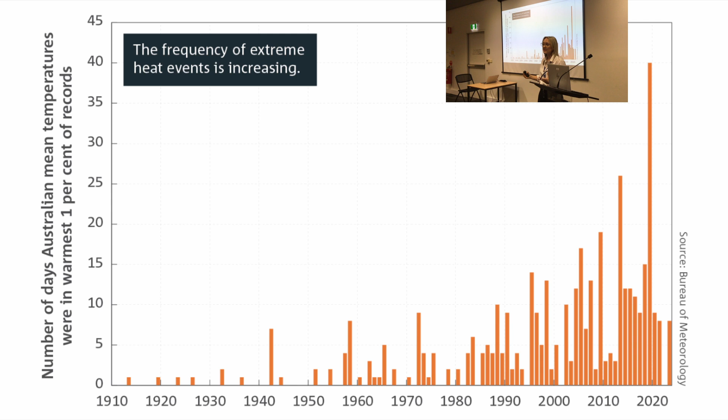You can see here in this chart that the frequency and severity of the extreme heat events we're experiencing here in Australia are only becoming more common with the climate crisis. The fact is that the last decade was the hottest decade on record. Last year, 2024, was the hottest year on record, and it's not showing any signs of slowing down soon. Already last month, January, was the hottest January on record. So we're seeing more and more of this, and the reality is that these extreme heat events, these longer, hotter summers are here to stay, and it's only going to get worse.

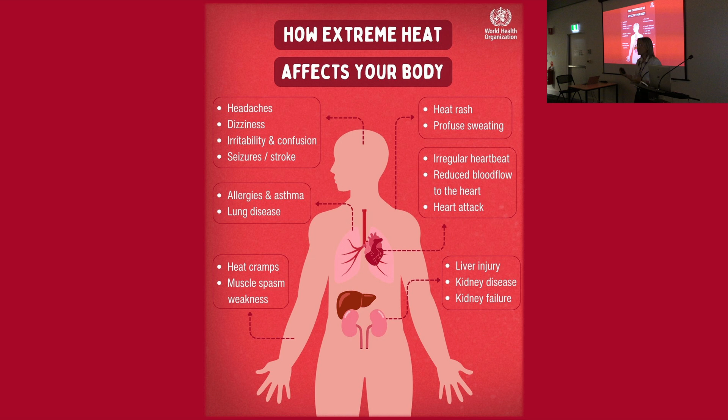Not only does this make for uncomfortable homes and uncomfortable summers, but it's also having major impacts on our health. Heat-related illness can span from anything from heat stroke, headaches, dizziness, to the other extremes of strokes and organ failure, heart attacks, and even death.

The reality is that our homes are not equipped to be able to handle the changing climate that we're now facing, and having cool homes is no longer a luxury. It's a necessity. It's something that we all need. But our homes weren't built for this. Most of our housing stock has really poor thermal efficiency. There's no insulation. So there's a lot of work that needs to be done to get our homes ready for these summers that we're having and that we're going to keep having.

So that's why we're all here tonight. That's what we're going to learn about. We've got our expert speaker here tonight who's going to share with you practical and actionable solutions for how you can make your home more comfortable in these summer months. Not only that, some of these solutions will make your homes more comfortable in winter as well, but they're also going to help you make your home more energy efficient. That means you'll be paying less for your energy costs over time because of some of these actions that you're implementing. And that's great because it's also going to reduce greenhouse gas emissions, and it's these greenhouse gas emissions that are fueling the climate catastrophe that is driving these heat weather events.

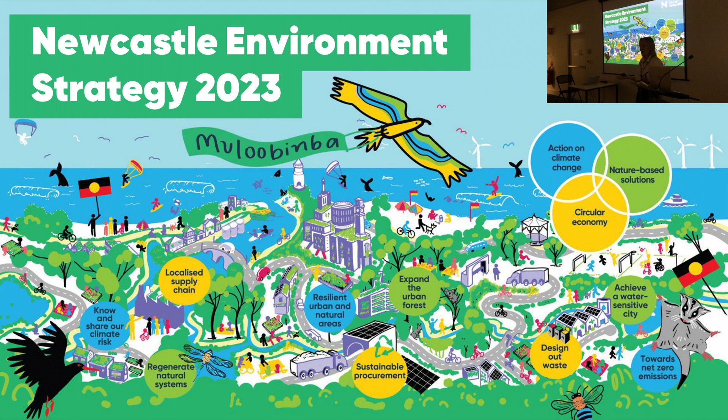So I wanted to really briefly touch on what we at City of Newcastle are doing about this critical issue. Our Newcastle Environment Strategy outlines our commitment on climate action, which includes being net zero by 2030 for our own organisation, and we're well on our way to achieving that, but also for the broader community-wide emissions as well. That target is net zero by 2040.

Last year, as part of working towards that target, we launched our Empowering Newcastle program. This is our community climate action program where we're working hand in hand with the community to help make the switch to renewable energy, to electrify our city and work towards this net zero future, this clean energy future. As part of that, we've got a bunch of education resources, some of which you have seen and had a look at today, and we're happy to share more of that, including our newsletter. We run events just like we are here tonight. We also do a number of community grants to help community organisations get solar and reduce their bills, and also to support community climate action projects as well, and youth climate action projects.

And we also run a suite of programs as well. A couple are coming up this year. One is our solar and battery bulk buy program. This is where we're helping residents who are interested in getting solar and batteries put on their home. We're going to help residents make sure that they're getting high quality systems, that they're getting a fair price, installed by quality installers and at no upfront cost, so you can pay it off over time with the savings that you're seeing from these solar and battery systems. Another program is that we're installing another 34 electric vehicle chargers across our city. So by mid this year, there will be 50 EV charging ports across our city for those that have made the switch and are planning to make the switch and the upgrade to electric vehicles as another way to save costs and reduce emissions.

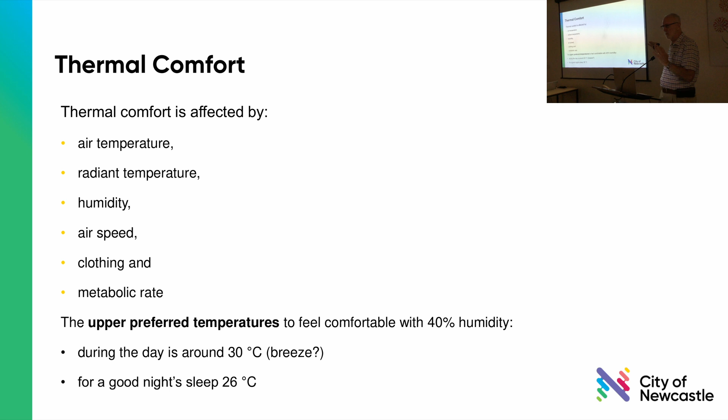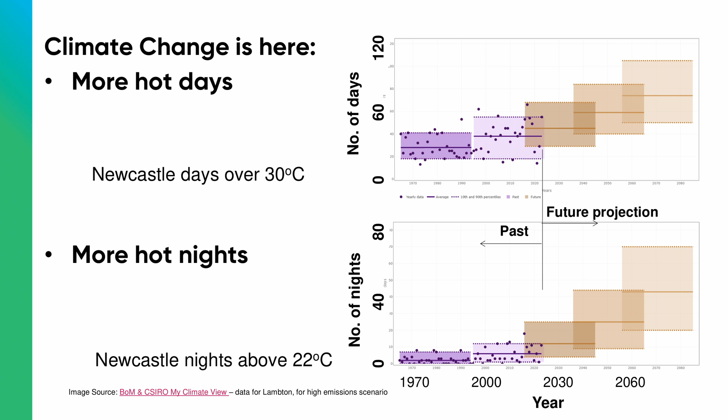Now this shows a graph of time in years, with that line in the middle showing past temperatures, average hot - each month is the average hot temperature for day and night, in Lambton over the past 40 years, 20 years there, 20 years there.

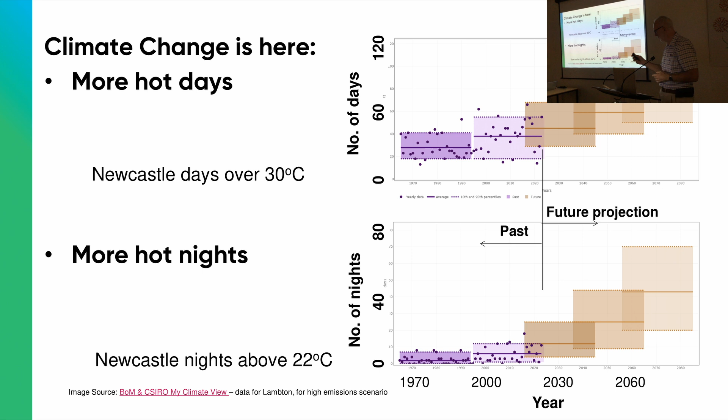The projection ahead is from BoM and CSIRO. This is conservative because they're using the highest emission scenario, but we're tracking a little bit higher than that at the moment, so that will be getting a bit worse. The important thing to notice is nights above 22 degrees are going to double or so in the next 20 years. So if your house is not prepared for a hot night, now's the time to try and get it fixed.

So to maintain thermal comfort, this presentation will cover warm or hot days, warm nights, extreme heat events, heat waves where you get several hot days in a row. Look at Western Australia and even Queensland have had some terrible times. Even South Australia, just terrible.

And then power outages - what happens? We had a 30-degree night in Lambton here about 6 or 7 years ago, and basically you couldn't sleep at night unless you had a ceiling fan. So they're the kind of things you've got to worry about. And if the power went out then, how would you handle that? So we've got some techniques here that will give you tips.

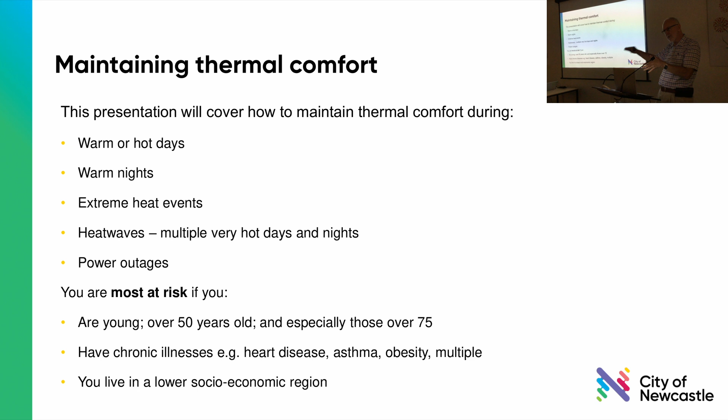So you're most at risk if you're an infant, if you're over 50, but particularly if you're over 75 - it goes off the scale there. You've got chronic illnesses like heart disease, asthma, obesity, or even multiple sets of illnesses. Or you live in a lower socioeconomic region, you mightn't have any air conditioning, for example.

The next big one is the windows, then the walls, the floor, and then the air leakage. The air leakage is incredible because if you're in a really old home, particularly weatherboard, it could be very large. How many people in weatherboard homes? Yeah, the Hunter's got a lot of weatherboard homes, probably more than 20 years old.

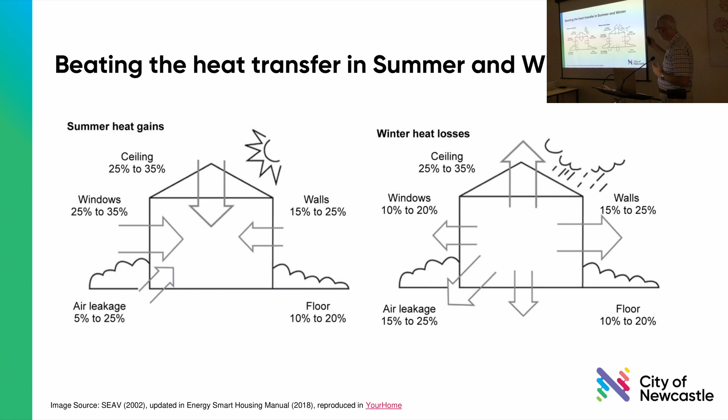Yep, okay, so the idea is, can we attack these areas in that kind of priority? And so here are the best tips across all these areas. The top 3 are about the same effectiveness - 3 stars out of 3, you can say. The next 4 have got 2 stars. They're not too bad, and then a few at the end.

But you can see how draught proofing, even though it's at the end, could actually be very effective if you're living in a leaky house. Now, the cost in the middle - the draught proofing is a no-brainer. Go around with a caulking gun.

You can have a sealant to plug up your pipes, little strips, weather strips, and even things like this. These are brilliant, these snakes that are double snakes - I used to have one of those, so when you move the door out and in, it just stays with the door. So it's a no-brainer to put draught sealing in place.

But ceiling insulation is also a very good retrofit. But reducing the area to cool - this room, for example, it's got a divider. When the divider's pulled back, it takes a lot of energy to keep this room cool, but as soon as you put that divider up, you've halved the energy. The same goes at home. I've asked people to put curtains in, say for 2-story houses, to block off the stairs, and you can put a little divider across the curtain. So reducing the area helps.

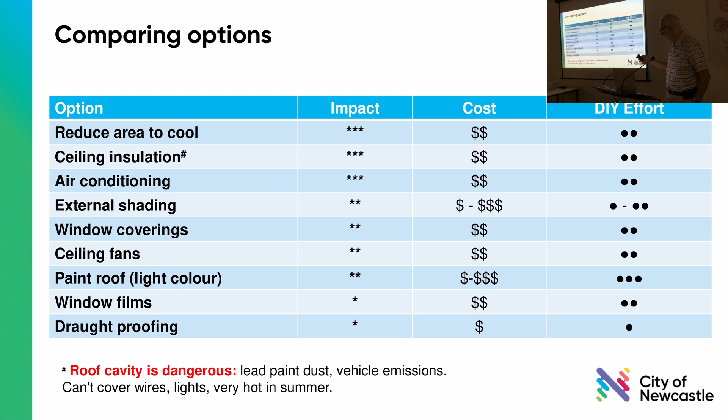So insulation is one of the best returns on investment. For about the $2,000 mark, you can get a clean energy fund loan, which is a cheaper loan, and it's actually a pretty good investment. And of course, if you've got a pre-1990 home, you probably haven't got any insulation in the roof unless you've got the home insulation program done. And pre-2004, well, you might have a little bit, but not enough. So it's only $2,000 will probably do your whole house. Maybe that was a few years ago, but a bit more now, maybe 2.5, 3.

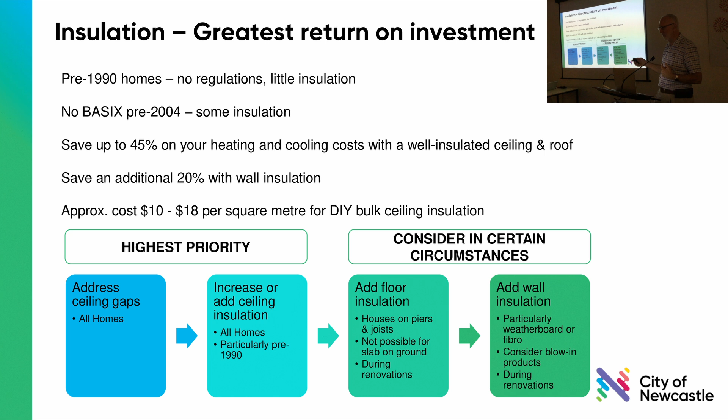And here's some priorities that we can go through. By the way, you can get a link to these slides afterwards, so don't worry if I have to thrash through this a little bit quickly, because there's a fair bit of information on these slides.

Now, this is fascinating. Who's interested in hiring or renting or borrowing those infrared cameras? Now, the way they work, every hot object radiates a little bit of heat. It emits a little bit of heat. And when you train that gun on it, it looks at how much radiation happens and converts that to a temperature. So it's an approximate temperature.

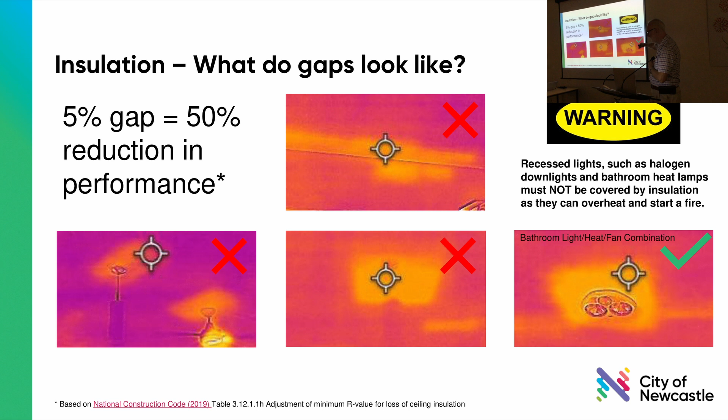And you can see these three on the left here. They've all got crosses on the right-hand top corner. What they're saying is there are holes; there's no insulation there where there should be. So your ceiling should be the darker red, but the light or yellow says there's a bit of a hole there. Whereas here, there has to be a bit of a hole around your lights, because that's a lot of heat and you can't put insulation around that. That's just the rule.

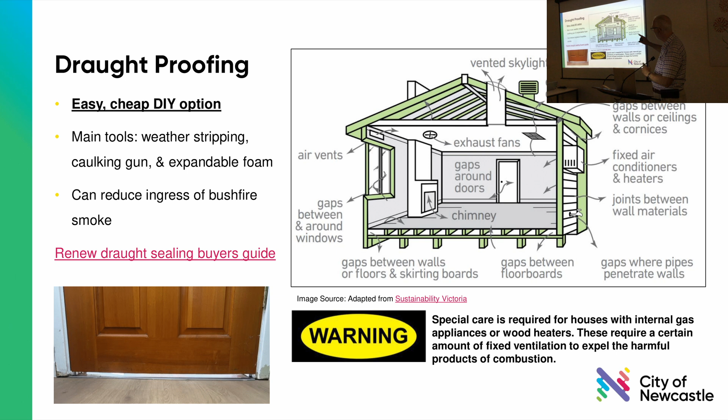Draught proofing, I won't go through this right-hand side, but there's lots and lots of places. I had an old chimney. Anywhere you had a pipe in the kitchen, you'll find they've left a hole. Around windows and doors, you can put foam seals you can buy off Bunnings. There are so many places in the house that you can gum up and put sealant, with caulking guns and weather stripping, etc. You can make a big difference to the house with just this one retrofit alone.

There's the windows, they're just holes in the wall. If you've got single glazing and it's a really cold night, the temperature outside is exactly the same as the temperature next to the window. And the same if it's a hot day. If it's 40 degrees, which it was recently, it'll be 40 degrees inside your house, the other side of that glazing.

In summer, when the sun's high, either have deciduous landscaping or eaves that'll stop the sun coming in. That's the passive house design. In winter, when the sun comes through at a lower angle, it gets drawn into the house and warms up the floor. And you can see how the deciduous tree has now lost its leaves. So that's a great passive house design, and everyone should be aiming for something like that. Drag the heat in in the winter, block it in the summer.

And the two mechanisms are radiation, where the heat's transmitted through the glass, and second, where the heat is conducted through, particularly with single glazing. Of course, external shading is the best way to stop the sun coming in, or in the case of conduction, double glazing, which is a bit expensive, but you can have internal window coverings. The ideal one is, remember the old pelmets? They were there for a reason.

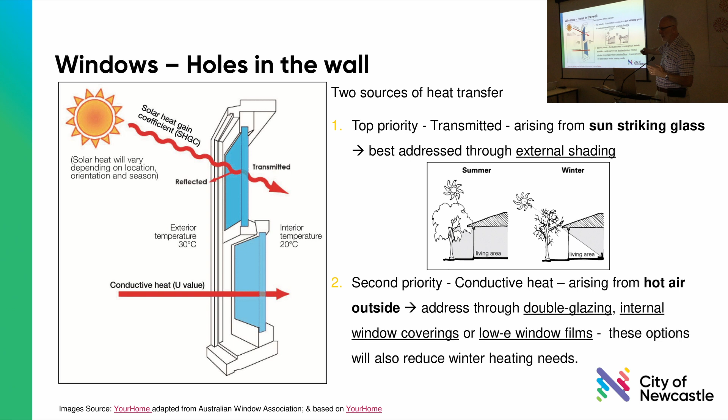So if you had a thermal lined curtain going all the way to the floor, and a pelmet, you're stopping this kind of effect. In winter, the cold air drops, and you're stopping any circulation of cold air into the room. And in summer, you're stopping the warm air coming into the room. So the pelmet's very important, and going all the way to the ground. Or a low E film; the low E film can trap the air as well. Now, the benefits of window treatments, let's see how we go for time.

Okay. Right, so there's the two mechanisms: radiation, the transmission through the window, and then conduction. If you borrow your infrared gun and train it on a window that's shaded and one that's not shaded, you can see one's 22 degrees and the other's 35, but the temperature outside is 23. So you can see a huge difference, 13 degrees.

Now, this is the window and this is the wall. Even though the window is shaded, it is still 31 degrees because it's 31 degrees outside. So it's the same even though it's shaded, because the conduction is still coming through from the ambient temperature.

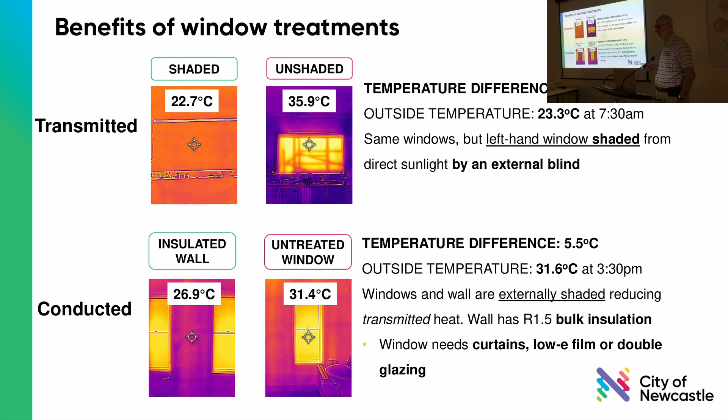So this is how you can test. I tried the infrared around here, and the insulation's pretty good in this room. So that's how you can test your ceiling, the walls, etc.

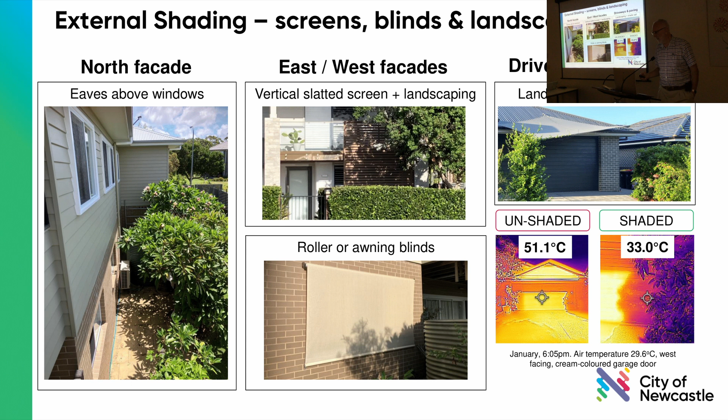And the honeycomb blinds, I know we got at least one person in the room with a honeycomb blind. Anyone else got a honeycomb blind? There's two. Look, there's 2 or 3 different types of honeycomb blinds. You can get them single thickness, if you like. Then you get a double in the middle or a triple in the middle. You can actually get like a 3 effect, and the ones in the middle can be reflective.

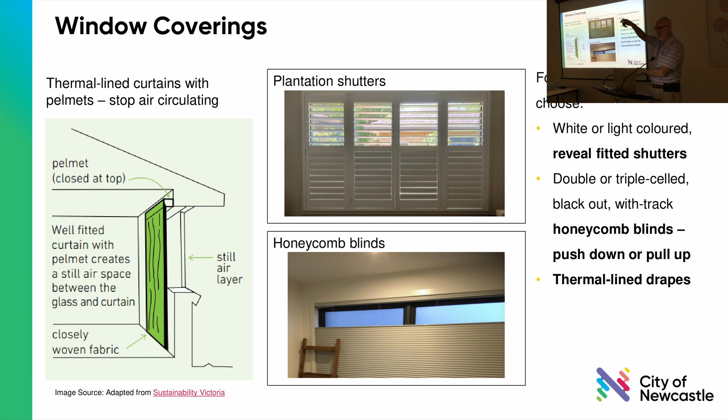They're R1. You know what I'm saying? Windows usually are like R0.2 or something. They're very small resistance. But when you come to this type of honeycomb blind, it's almost like putting half a wall in there. It's brilliant. You've got to be careful with them, but these ones can pull up for privacy, or pull down. So quite a nice blind.

Now, there's more window treatments. Basically, we've got to try and stop that transmitted heat from striking the glass. You can have a reflective foil, and this is particularly good in the West. So it's like a perforated aluminium. On your buses, you can look out the window on the bus, but you can't look in. It's that kind of effect.

So it'll reflect. In fact, I was at a neighbour's place down in my eco village recently, and she has a big problem with heat in her eastern bedroom. And I said, just get a blind, and she'd be right. I just did that myself. And she says, no, I want to look out. It's my happy space. Oh, I go, well, okay, no problem. We'll see if we can get you the Renshade, and we'll try and get that on the external and see what happens.

Anyway, so look. Window treatments like films will get a little bit tricky. Your best bet's to get an energy audit there, and you can get an energy audit perhaps up around the $300 mark, depending on scorecard or not scorecard, etc.

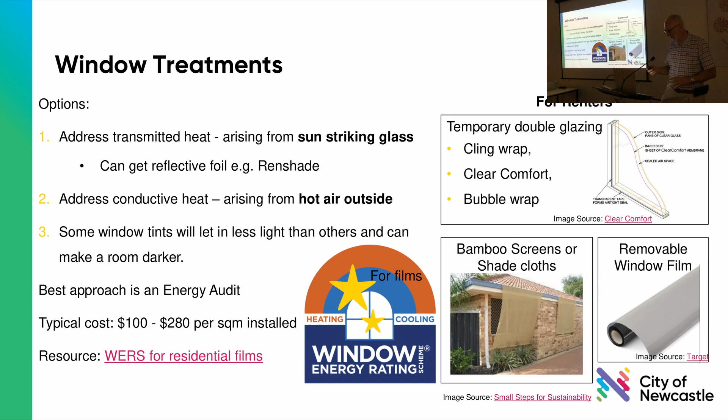So if you can get your roofs a lighter colour, or certainly if you're changing your roof.

We hold questions to the end, Esther. Thanks. It's just that there's a few slides to get through.

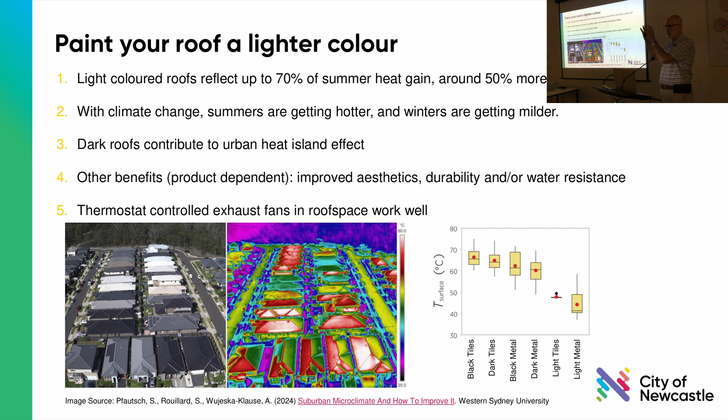And you can also put an exhaust fan in the roof space, put a thermostat on that, and that'll help take the heat out and maybe still leave the heat in there for winter. So we'll move on to appliances, and also looked at resilient cooling appliances for air conditioning. So the first trick is make sure you do the energy retrofits first. And the reason is you'll need a smaller air conditioner. You'll save your money in running that smaller air conditioner. So in other words, it won't cost you too much to get those energy retrofits done.

So they're saying you can. The cheapest one really is a reverse cycle. Then look at ducted, and then portable. The ducted loses 10% of energy, so it's not that efficient. The portables, well, you don't get them as efficient as the reverse cycle. And the reverse cycle means you can use it for heating as well as cooling. And they're often split systems. There'll be one outside the house and then the thing on the wall.

So then it's very important to maintain these at least once a year. You can actually pull the cover up, there's a little filter in there. Just take it out, clean that filter, put it back. And also the set points are very important. Who goes into a house? Even this room here is probably about 22, 23 at the moment.

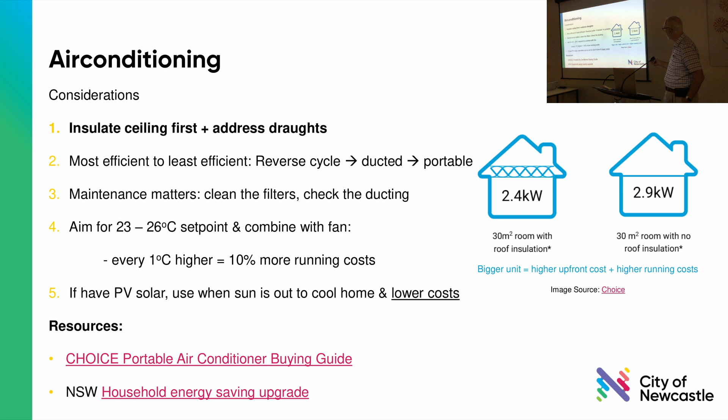Okay. So ceiling fans and cross ventilation, this is probably the easiest way to stay cool with airspeed. And very few people know how to manage natural ventilation. Who's got southern windows that they keep opening up? This is it. You've got to have your fly screens, your security screens and all that. And then when that southerly breeze comes through, the change, take advantage of it. So natural ventilation is brilliant. But if you haven't got a breeze, certainly use a ceiling fan. They're very cheap to run, much cheaper than an air conditioner. The DC ones are more efficient, direct current.

And the best fan of all, my supervisor was basically an aeronautical architect, and he was the guy that had the patent on the Big Ass Fans, the ones in Bunnings. So he invented that, and it's got a special technique. It sweeps every so often, just slowly, and it actually gives you a bit of a burst, if you like, and that's a more effective way of keeping you cool than a fast fan. So he worked all that out.

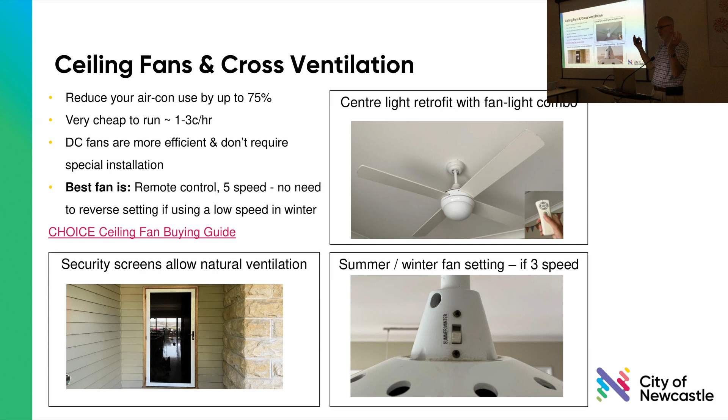So if you can get a remote control 5-speed, there's no need to reverse it. Most fans you have to reverse summer, winter, and you keep forgetting. But they're 3-speed usually, and the reason for that is the lowest speed is still a bit too fast in winter, and you want to kick it off the ceiling. But with the 5-speed, you can just have the first speed coming down nice and gently and keeping the heat down. And with the remote control, when you're in bed, you can just switch it off in the middle of summer if you need it, things like that.

There's some good programs going on here. The council's doing quite a lot of good stuff, and the Sunspot website can help you get PV and batteries. The council's actually doing a solar and battery bulk buy with installers they know are good, and you don't have to pay any money up front. They'll install it, and you just pay it off with the savings.

And you've got the option to participate in a virtual power plant. What that means is you may be able to get more rewards back and pay it off even quicker.

Energy Made Easy is a website where you can jump on and the government will compare your bill requirements, if you like, and look at other suppliers, other energy retailers who may be able to supply a better or cheaper deal. You go back to your supplier and say, I can get a deal like this, and they'll probably reduce theirs by 10%.

This is where we have resilient appliances. Has anyone had any blackouts lately? What, David? Yeah, well, we had some down in Narara, but it didn't affect our village. We have our own big battery inside, so we don't go off.

Professor Pears worked this out for us - that you could actually have quite a low kilowatt hour requirement needed overnight just to keep the essentials running if the power goes off. So imagine you don't have a huge battery to supply that if the power is out. We worked out perhaps a 6 kilowatt hour battery, or three-phase, 3 kilowatt hour per phase.

So if the power fails during heat waves, you can get solar with a battery backup, and the battery can work then without the external grid. So you isolate the house.

Then you run your essential appliances overnight, and try to concentrate on having a small air conditioner - one with an inverter so it kicks off gently and can run quite low, perhaps only powering one room. I'll come to where you want to have that room in a minute.

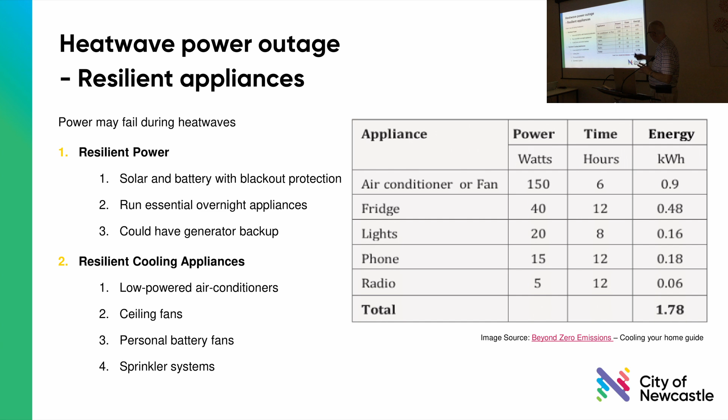It's a bit old school. If you're in the country, you might have a sprinkler system on your house in case a bushfire was coming. That sprinkler system could be turned on to cool the house, because the latent energy would cool the house right down - like a sudden rainstorm on a hot day. And then ceiling fans, well, that assumes you have a solar battery.

Now, this is really a combination of behaviour, retrofits, and appliances. It's saying go to the southeast corner of your house or the basement area, which is the coolest area in the whole home, and if you haven't got the initiative to do the whole house, just do one room. Go in there, make sure you've got your curtains, your shading, your tiny little air conditioner, and a solar battery.

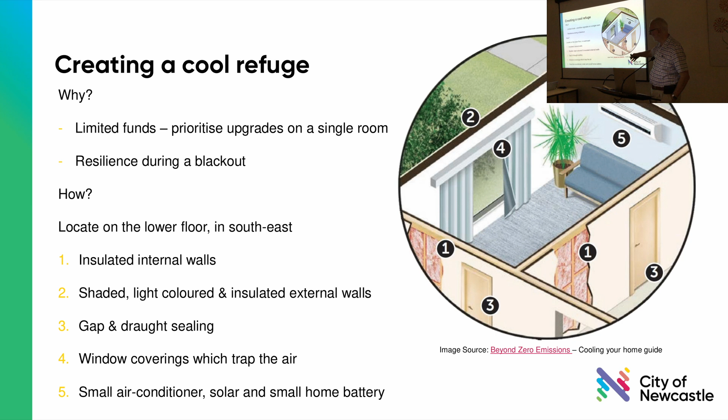This is your resilient room - they call it the cool refuge. You can have limited funds, but you can be very resilient during a blackout heat wave. You'd also insulate the internal walls, make sure your gaps are all done, and have window coverings and all that.

Now, what would happen if there's a heat wave in the morning? So tomorrow, the news is saying, from here on we're going to have 40-degree days and 35-degree nights. Well, the first thing you want to do is what they call night purging - open up the whole house. This assumes you've got fly screens, security screens, and that you're not next to a noisy street and all that.

Then overnight, let the whole house cool down as much as you can. And once that happens, you set the temperature of the house, if you can, down to 22, 20, or whatever order.

And then you're going to get a 40-degree day. What you do first thing in the morning is go through on the eastern side and close all the curtains, close everything up. What you're trying to do is protect the living room and all the bedrooms with that low temperature. So you close all the internal doors in those areas, and make sure nothing comes in from the outside from the east in the early morning. During the day, make sure you close down the north and then the west.

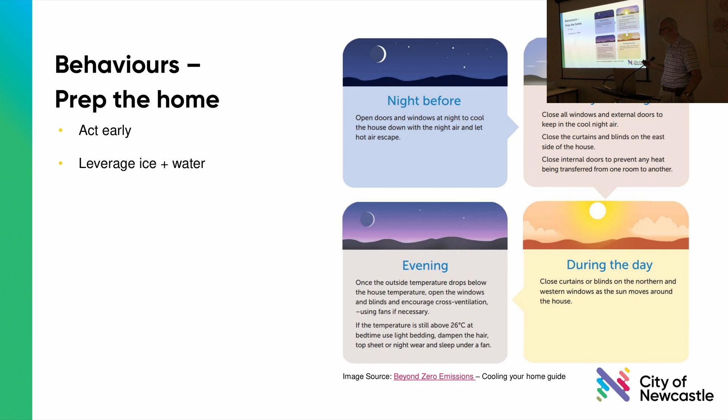So with 30 degrees at night, I can tell you, that was with the 6 stars. So then, if it's an extremely hot day, what do you do? Now you've really got to perhaps leave the house because you might not have air conditioning, right?

So you would go to somewhere like a council facility. Hopefully councils have identified these locations, probably shopping centres, libraries, public pools, movie theatres, restaurants. Friends or relatives out there might have air conditioning for you. But you've got to plan how you're going to get there. If you're not quite as mobile, you may need a taxi, and then plan your medications. Maybe some medicines have to come along because you may have to stay the night over there.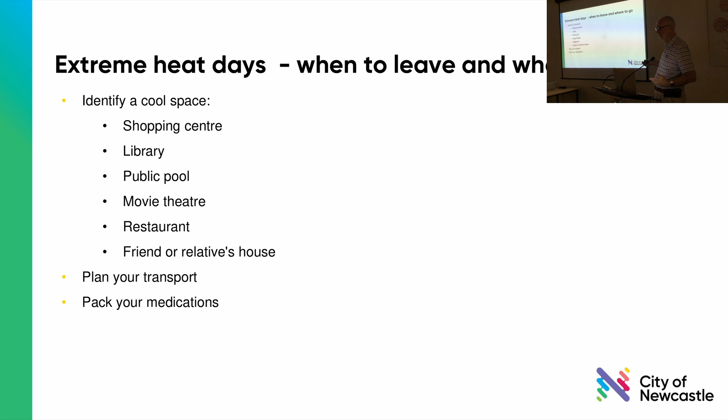So you've got to plan exactly what you're going to do on extreme heat days. And then, looking after others, you've got neighbours and friends, are they okay? It's very important to look after them. Your pets too, you saw what happened in the bushfires, and even the wildlife. So you've got to try and look after them as well.

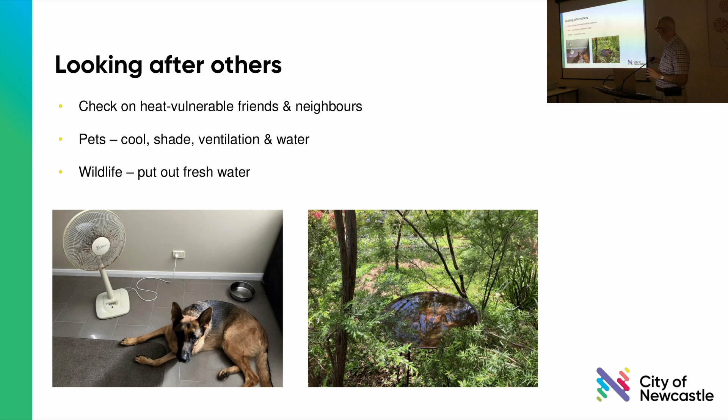And then if we talk about energy efficiency assessments, there's a thing called an efficiency scorecard, and Ian Wilcox, who was here earlier doing some of the expert workshop, can do the scorecard. There's a new one coming out by the federal government, and they're trying to combine the scorecard with NatHERS, and the whole thing's moving quickly. What they're trying to do is, like in Canberra, if you sell or lease a house, you have to get a star rating. It's called mandatory disclosure.

They're trying to bring that in for the whole of Australia, and it's getting here. That's why they're moving towards merging scorecard and NatHERS.

You should be able to get this. The price will probably be coming down a bit, but it's quite a good scheme. They give you a list of all the things you can do. It's a bit of a template, and they'll tick the ones that suit you and give you a rough idea of what happens. But you can see they go right into it.

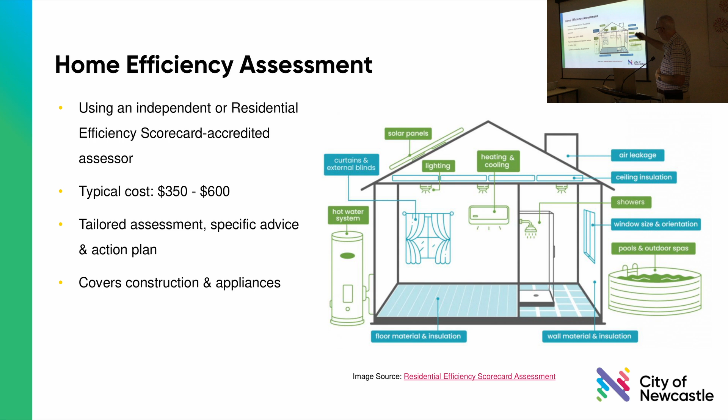I used to do some energy assessments, and we'd be looking up the model and the energy ratings for every appliance, and then we'd give you a star rating for the house, showing you how much carbon dioxide you're using.

So it's a great way to get a particular, a professional view for your house. So if we're now trying to reduce our impact from an energy point of view for the whole house, how would you do it? Well, you want to get off gas.

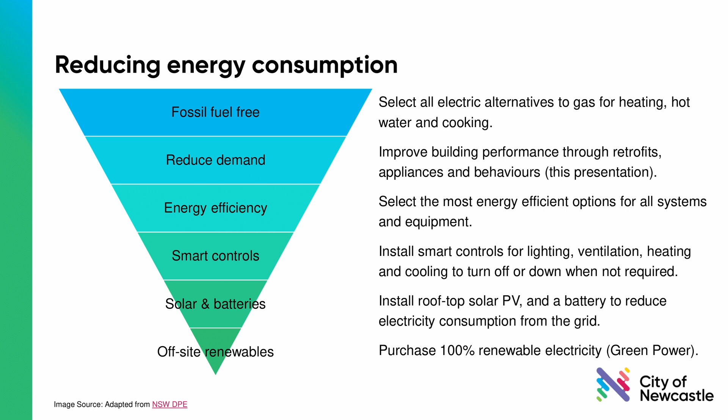Now, gas, we can't get to zero carbon or zero energy with gas. Gas is going to be the one fossil fuel. You might put yourself on electricity and have solar panels and batteries and everything, but if you've got gas in the house, you're going to have to get off that to get down to 100% renewables.

You reduce your demand in the house by getting that envelope nice and tight, do the insulation, do all those things to the envelope. And you can improve your appliances and behaviours.

You can then, say you're planning, you know that your hot water system is going to go. You should be doing the research now. Is it going to be a solar hot water system? Is it going to be a heat pump, or is it going to be resistive?

I'd be recommending a heat pump. There's 3 types: the cheap one, the middle range, and the expensive one. And the middle range is good enough. The propane type heat pumps, there's quite a lot of them. They're about the $3,000-$4,000 mark, and they've got a reasonable warranty.

The solar hot water now is a bit more expensive. It has to be boosted by gas or electric anyway.

And that book by Tim Forcey, anyone heard of the My Efficient Electric Home Facebook page or the book? Yeah, well, he has got a good chapter there on heat pumps, a hot water system.

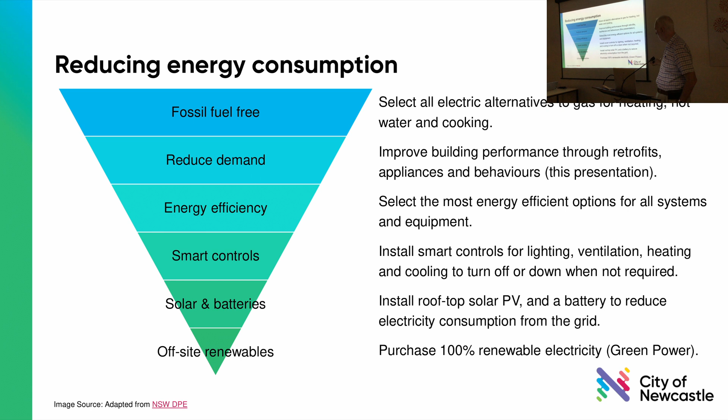Is anyone in a high-rise unit? Okay, well if you're in a high-rise unit, it's difficult to put solar and things like that on. You can go and buy green power for an extra 10%, and you've just got yourself 100% renewable energy. It's the easiest way to go. So you can see all the options for how to reduce your impact, and that's how we should be trying to get to zero energy and zero net carbon.

This is a brilliant resource. Take the heavy one though, or read it online. This is the 6th edition - I think I got about the 4th, and even then it was pretty heavy, but with a lot of really good tips. The easiest way is to use it online and just do a search on something, like insulation, and it'll give you a big long explanation of how to do it, what has to be done. It's brilliant, and it's coming out in the 6th edition with batteries and all sorts of really good stuff.

Cooling your home - this has got all those tips for resilient cooling devices, even evaporative coolers if you're out west. Is anyone not at Newcastle, but a bit further out maybe? Or CBD? Where are you from? Whereabouts? Oh okay, yeah, well maybe you're a candidate for an evaporative cooler, because it doesn't work well with humidity.

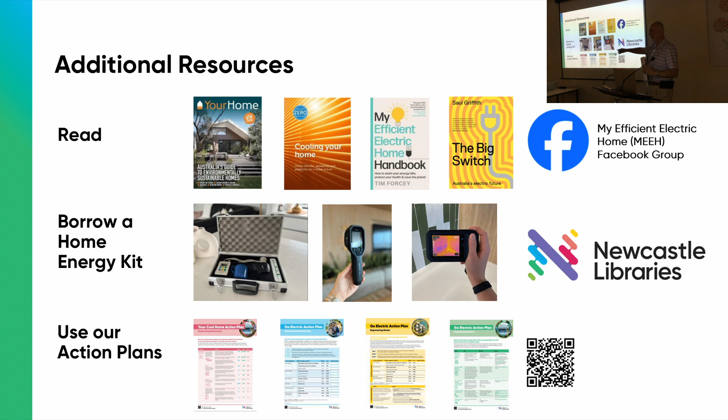You say tile roof - is there a difference between terracotta roofs and concrete roofs, in terms of that level of efficiency? Look, they're both, if you like, depends really on the colour to a large extent. From an operational point of view, in other words how much heat would transfer, they're both similar in terms of the properties that allow the heat through.